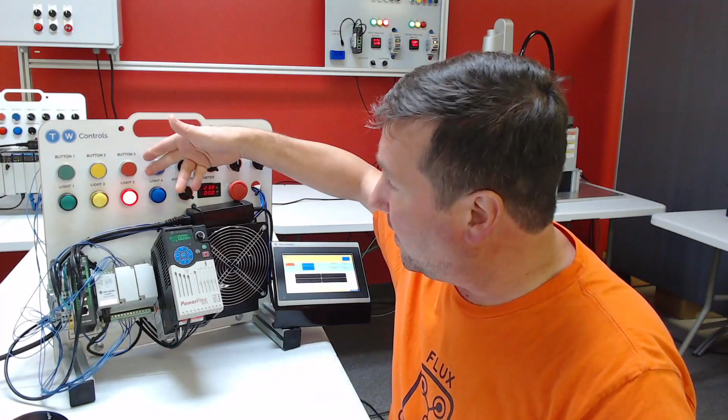Just to add a little bit of variability, pressing the red button won't make it go to the next step, but we need to press and hold it for 1 second, and then the blue light will come on. And finally, pressing the blue button will start the process all over. While this is a really simple thing we're doing here, this can easily be scaled to any machine.

And the best part about the methods we're showing here is they are compatible with all Allen Bradley PLCs. From the ControlLogix and CompactLogix for Studio 5000, formerly RSLogix 5000, to RSLogix 500 for the MicroLogix and the SLC 500, and even the Connected Components Workbench for the Micro800 PLC. Actually, these are probably compatible with most brands of PLCs because they use basic programming fundamentals.

Now, I'm not a fan of all these methods, but you will run into them out in the field. And I debated what order to put these in, and I decided to put them from the one I'm most likely to do to the one I am the least likely to do. And that doesn't mean the ones on the tail end are necessarily the worst. They're just the ones, in my opinion, that I wouldn't use to program.

In this lesson, I'm going to show how to use a bit seal-in to track logic. Now, I'm not really a fan of this method, but you will run into it, so we do need to understand it.

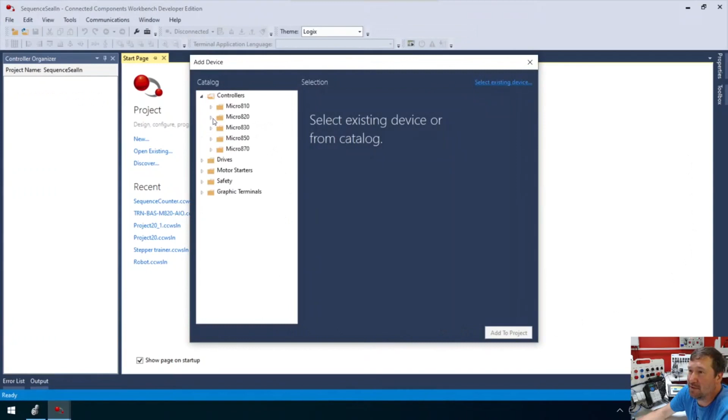All right, so again, we're going to create a new program, and this one is going to be sequence seal in. And we're going to go to Controllers, Micro820, and we're going to select the 2080-LC20-20QBB. And we're going to add it to our project.

And all right, now I started the last one a little different because we were in the default theme here. And I want to make sure we didn't get lost there. This is how the default theme works. And if we switch over to the Logix theme, it kind of lays out more like Studio 5000 does. And so in this case, our main task is where we're actually going to create our programs.

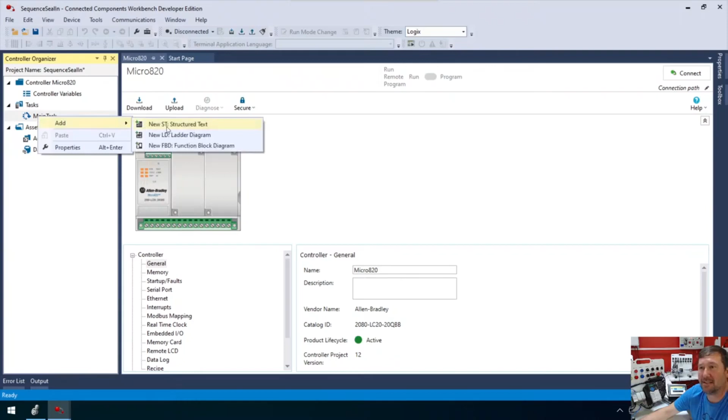So we're going to right-click Main Task. We're going to create a new ladder diagram program. And let's go ahead and rename that. And we'll just call this our outputs. Although really we probably could cram that out. No, you should have probably some organization. So yeah, we're going to do that. And we're going to add another one. And this one we're going to rename to our sequence.

And actually, same deal as last time. You can drag these around. Oops, I can drag program 1 up. And there you go. Now it's above. I never played with this. Can I rename program? Oh, yeah, look at there. So I could also rename this to sequence. I don't know why I would need to.

In this one, we're going to be doing the seal in. And of all of them, this is my least favorite probably. Actually, this is my least favorite between this and the latch unlatch. Now these work, so I can't put them completely down, but I would not do the seal in or the latch unlatch in this case. And we'll talk more about the reasons a little later, but let's just get this in there first.

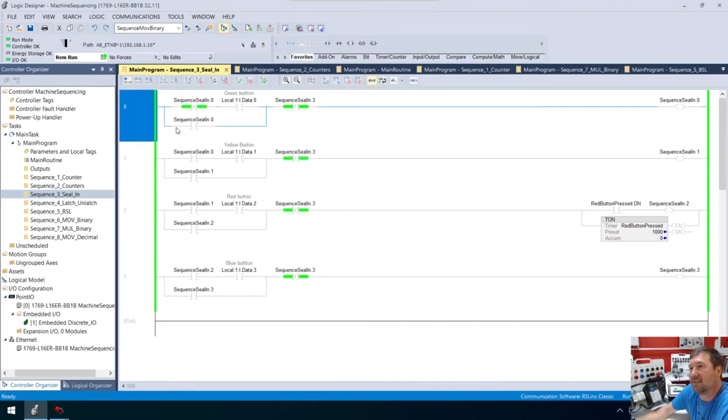So in this case, we have a sequence seal in, and we're kind of working down through here. And we're sealing it in till the end. And this is kind of our basic start-stop circuit. And really, this isn't that much different than what we've done before.

First, in this case, it's controller variables. Let's put in some descriptions or some aliases. Output 0 is going to be light 1. And then output 1, oops, it's going to be light 2. And light 3, and light 4.

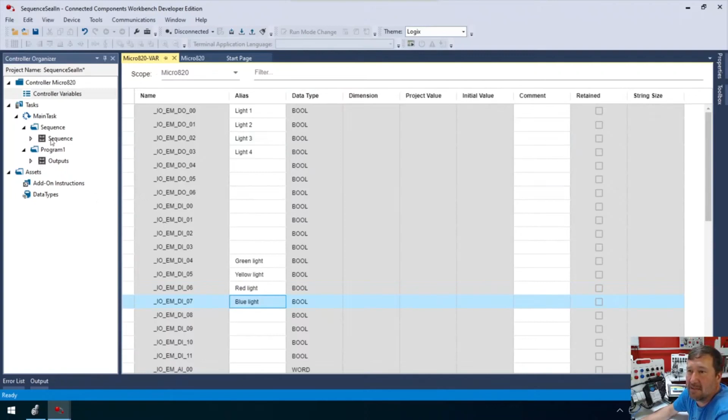And then down here, input number 4. I don't know why I'm not labeling those as colors up there, but that's what I did in the previous one. So in this case, it's going to be the green light, and then the yellow light, red light, and the blue light. It's pretty much the exact same thing as we did last time. And then we are going to need to create a tag. Whoops.

Should have done that while I was over there. Let's go back over here. We're going to create a tag down here, and this is going to be our sequence. And it is going to be, oops, why isn't that letting? Oh yeah, that's one thing I stumbled on in another live stream: you cannot name a tag the same thing as a routine is named, which can throw you because there shouldn't be any reason for that, but okay. Sequence seal in, that's what we'll call it. And this will be a DINT.

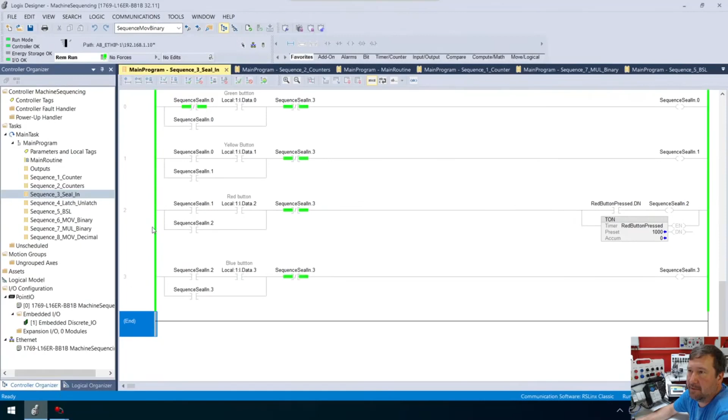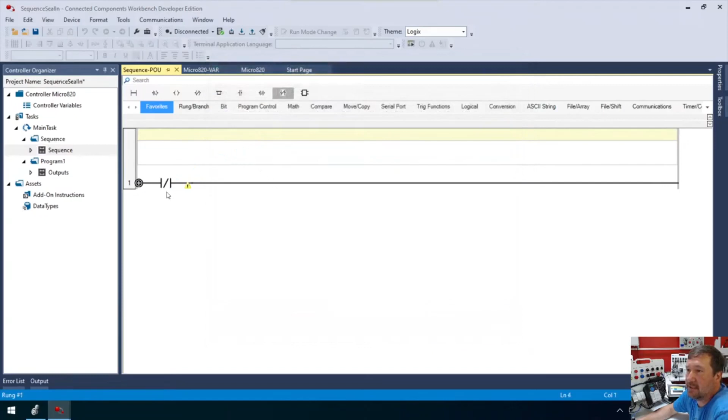And in this case, we're going to be doing it just like we did here. So first we're going to be looking for the sequence seal in not to be done. So over here, we're going to use a reverse contact, an examine if open, and we're going to find sequence seal in. Now, what a lot of people don't know is at the end of this, I can just put .0, and that's going to look at bit 0 of the sequence seal in. And then I'm going to look for this green button. So green, did I really put light on that? That is input 4, okay.

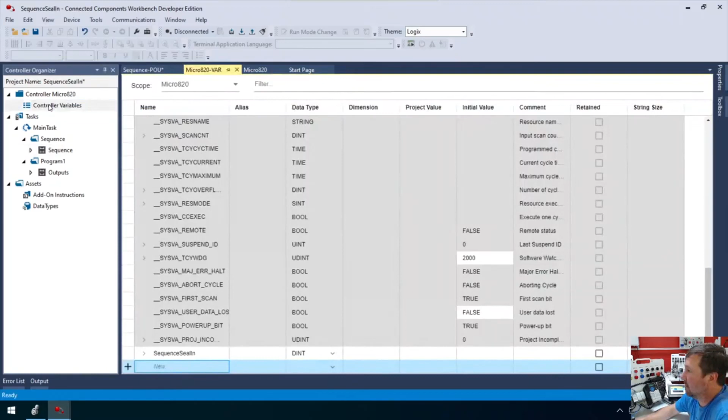I'm sitting here just talking away, and why didn't somebody correct me again? Yeah, guys, you can correct me. I won't get offended.

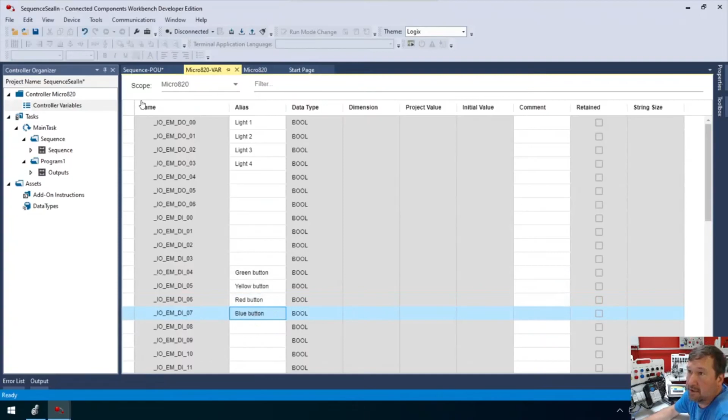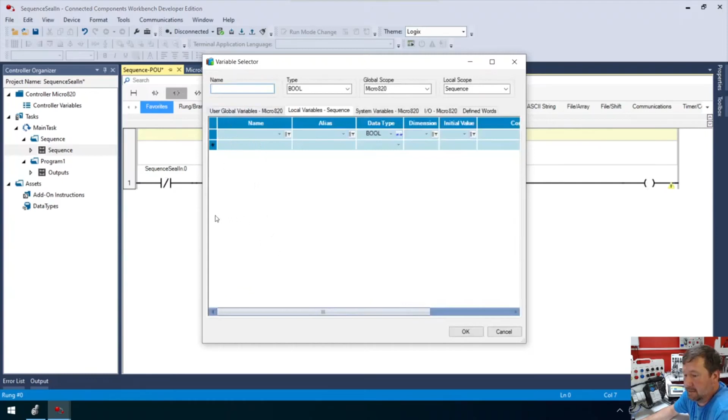These are all buttons. These aren't lights. Button. Button. Button. And button. Okay, the green button is what we need, and it doesn't immediately update. I have noticed that. We just go off of it, go back on. I think you can also close the tab and open it back up. But green button, and now we're going to put an output energize here. And actually, we can just escape out of this because we're going to copy this, and we're going to put it right there.

And now we're going to put a branch around this. Now this may look confusing right now, but we're going to go through it when it's done and explain exactly how it works. All right, does that look pretty much the same as that? Yes, it does. So we got that one done. Now we're going to copy and paste this down. Oops, actually I shouldn't have done that but once because we had to make a modification to this first one. It's going to be that. And then seal in will be 1. Okay, now we can do some copy and pasting. Well, that's got to be 1. Okay, so seal in 1.

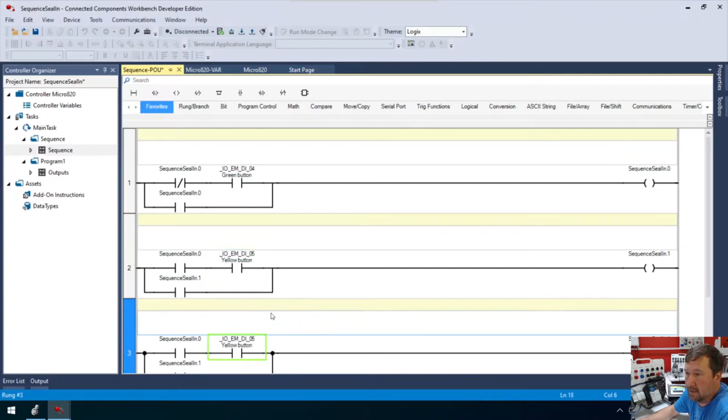The second one is the yellow button. And then this one is going to be the red button. And this one will be the blue button. And so this one was 0 and 1. This one's going to be 1 and 2. This one is going to be 3. Oops. This one's going to be 2 and 3. And then over here, same deal. 0, 1, 2, and 3. Actually, no, I did something wrong there. I can tell I did something wrong. Oh, except I forgot the seal in piece here. All those are 3.

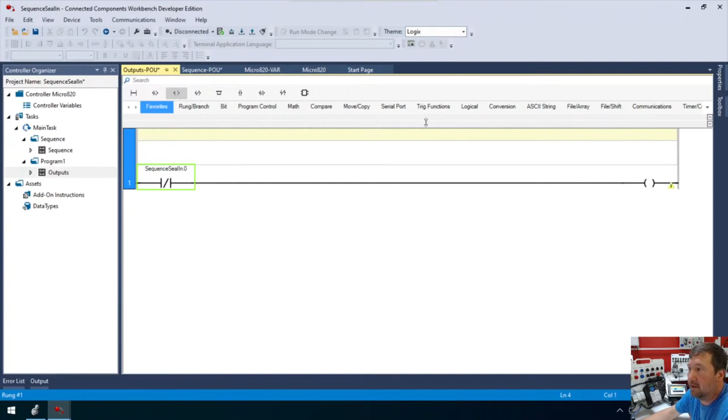Okay, so that takes care of that, and then we're going to have some outputs here. And so for the first one, sequence seal in at 0, it's going to turn on output 0. One. So 0 and not 1, and then 1 and not 2, and then 2 and not 3.

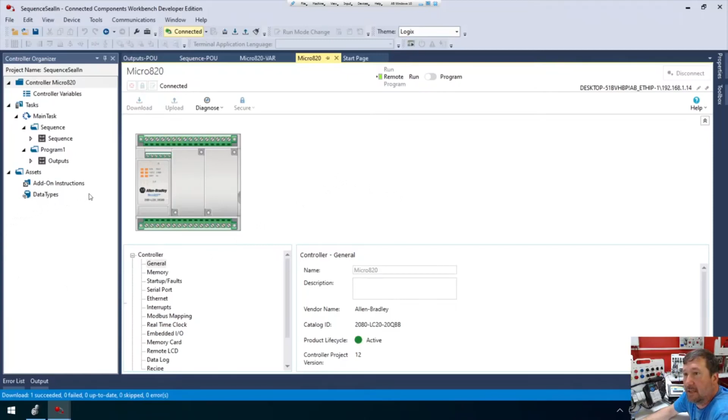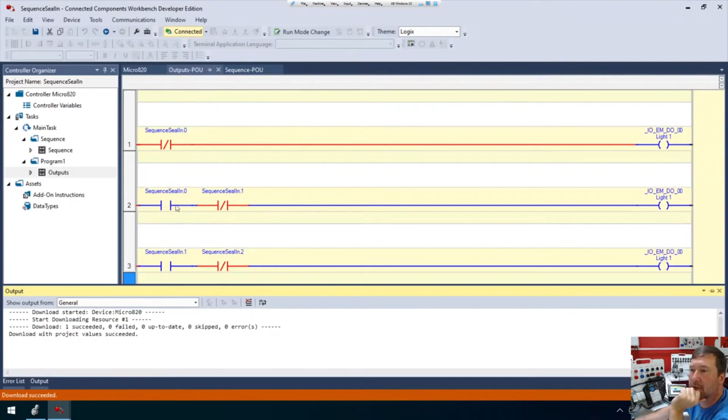All right, so first let's just download this program so we can see how it works. Okay, well, we're in run mode and our light is not lighting up, so I have something wrong. So let's go in here and figure out what's going on. We're in run mode. Oh, well, again, it's going to do exactly what you say, but I copied and pasted. This is output 0, output 0, output 0, and output 0. So that's not going to work. So let me go offline and fix that.

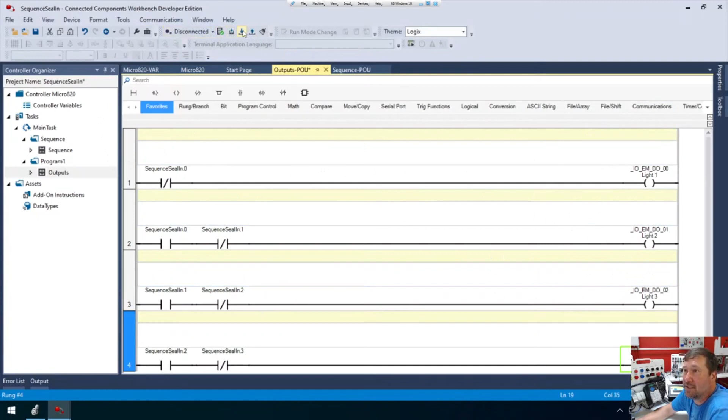Okay, now we have a green light. Now this should work exactly the same. So I press the green button, the yellow light comes on. I press the yellow button, the red light comes on. I press the red button. Ooh, I didn't put the timer in there. So we got to fix that because immediately when I press the red button, it goes to the blue, and I press the blue and it goes back to the green.

So let's go ahead and put the timer in. I don't want to shortcut this one too much. Now I got to tell you already, and you notice I didn't spend a lot of time on the seal-in, because after thinking about it, this is one that was brought up in the last live stream as an option, and I don't think this is a good option. But let's go through it and give it a fair shot. Right here, I forgot to put in the TON timer. So we'll drag that output energize, and then we'll bring down a TON.

Well, Mustang, you know something? We learn from our mistakes, though. So I get excited about mistakes. I call them learning opportunities. I don't want to make too many that are just like, all right, you're wasting a lot of time now, though. So yeah, feel free to reach out and be like, hey, you forgot this.

So let's see. We want a 1 second timer there. Oh, well. Okay, you didn't even see what I did there. But I added a timer.

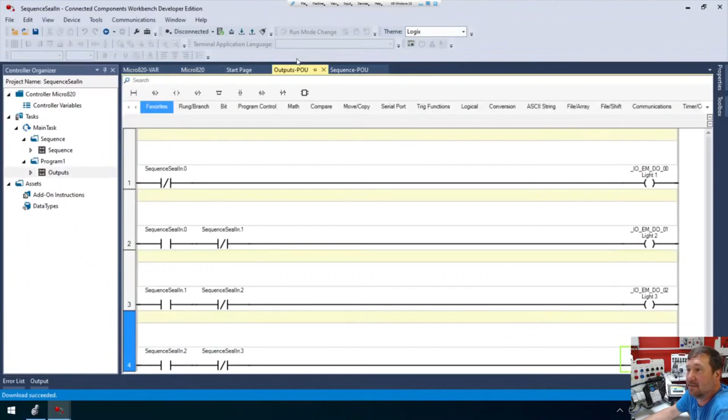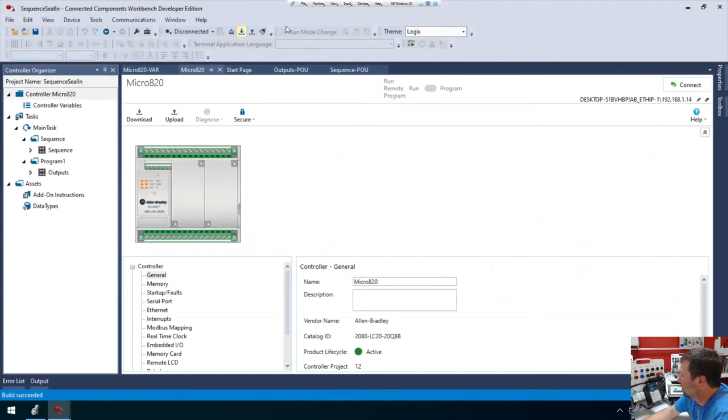So, yeah, you didn't even see what I was doing there. But let me just show you, since you didn't see it. Mainly I added this timer right here. And this is the same as all the others we've had. Mainly this red button we want to be pressed for 1 second before we move on to the next step. So I'm going to download this program.

So now if I press the green button, it should go to the yellow light. If I press the yellow button, it should go to the red light. If I press the red button, it doesn't. But if I press and hold it for 1 second, it goes to the blue. And then the blue button takes it back to the green. So it does exactly the same thing.

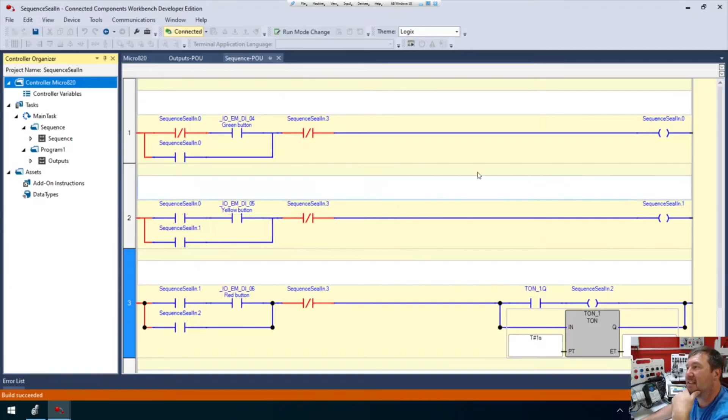Now my problem with this is overall, what step exactly is this in? And mainly, I don't think this is very clean to troubleshoot. Now, there's some things we can do to add to troubleshooting. So let me give this a fair shot.

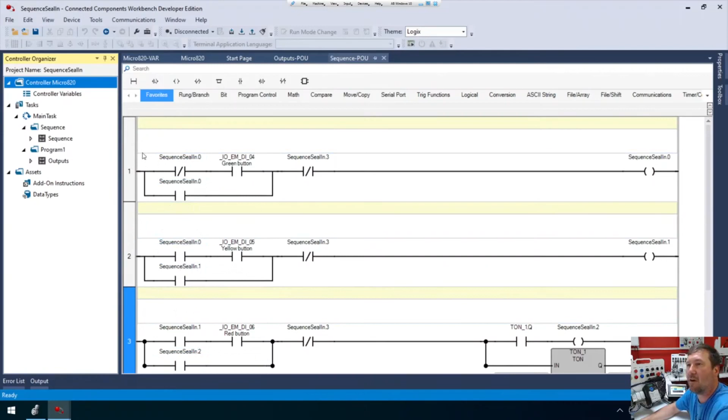One, I just like having a step number. Like all our previous ones, we have been able to look and say that we're on step 0, step 1. Well, in this case, we're on 0 but not 1, or are we on 0 but where are we? But we can make it a little easier. We can add a rung right here.

And I am actually just going to copy this, and we'll paste that 3 times, somewhere around there. And we're going to make this number 1, and we're going to make this number 2, and we're going to make this number 3.

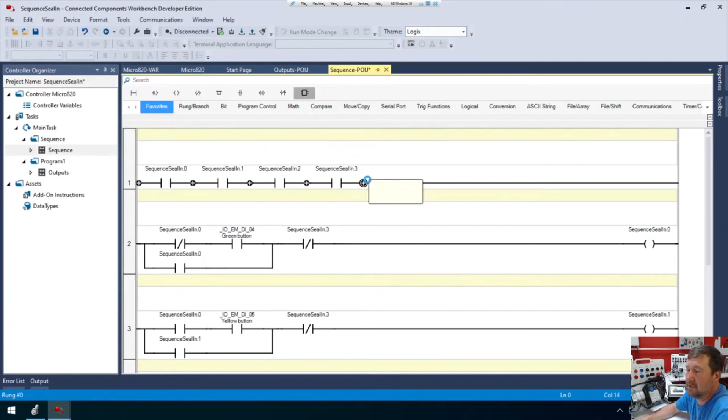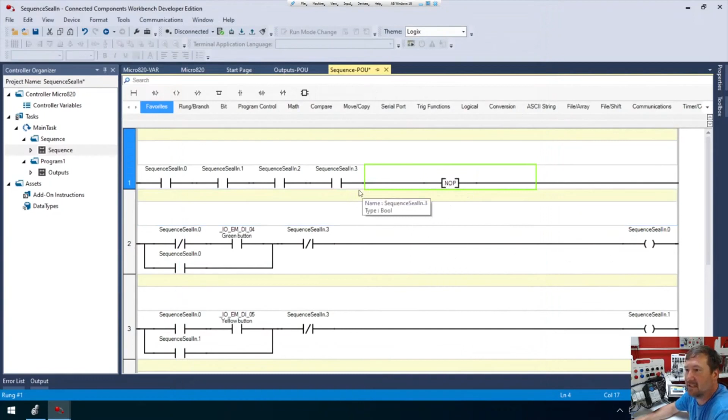And then, honestly, I'm trying to think, does Studio 5000, Connected Components, have an NOP instruction? NOP. There you go, no operation. Now, if you're not familiar with a no operation, it's just that. It just does nothing. But it's going to let that rung be true. So I'm going to download this. What I just added does help a little bit. It wasn't quite online yet. It's almost there.

But okay, right now we're in step, we'll call it sub-0. And honestly, I wouldn't do it exactly this way, but what I find the reason a lot of people want to do the seal in is they don't realize you can mix bit instructions and number instructions. So I left the opportunity to use numbers out of this.

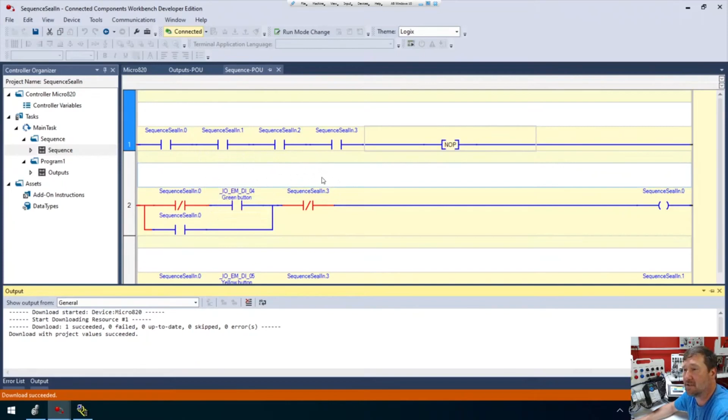But if I press the green button, then the yellow comes on, and now we can see that, all right, seal in 1. And so what people say is that all you got to do is look across something like this, and you'll know exactly what step you're in. And this is similar to what I did in my first program,

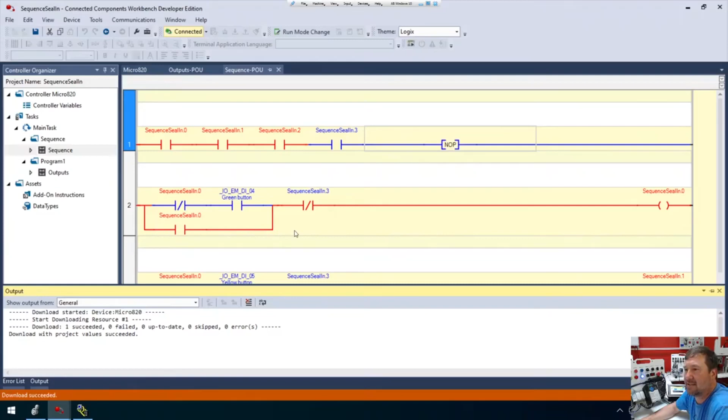but I think I left a lot of opportunities out for troubleshooting. And also, it really becomes a bear if I want to insert another instruction in the middle. Mainly because to do it, I have to shift all these down, and I'm not going to do that. I'm going to end up adding some crazy oddball bit in here to add another step in. So overall, I don't think that the seal in still is a good way to do it. So I hope this video has been helpful.